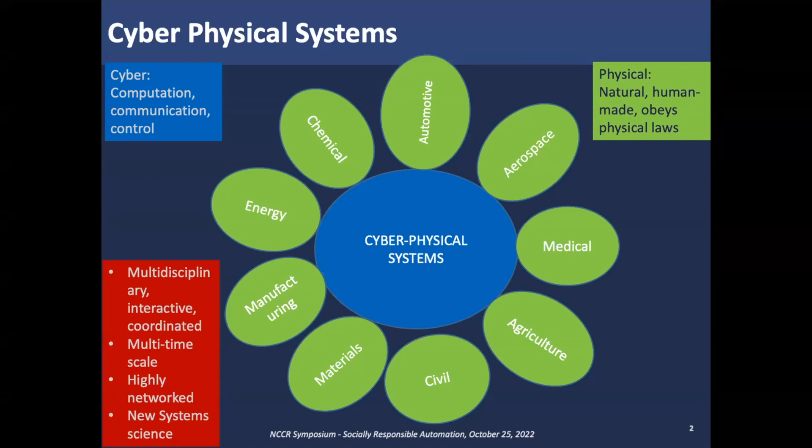Obviously the cyber aspects have to do with computation, communication, and control. On the physical side, you've got natural and human-made aspects which obey physical laws. As these things interact, they're multidisciplinary, interactive, have to be coordinated, have multiple timescales, are highly networked, and perhaps require new system science. Across the board, the role of humans, as Giancarlo mentioned, is increasing. Not only is it increasing, there are different ways in which the interaction between humans and automation are beginning to manifest themselves.

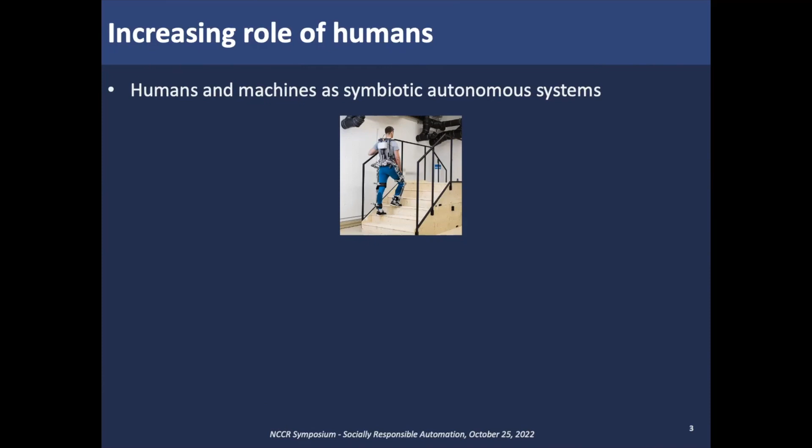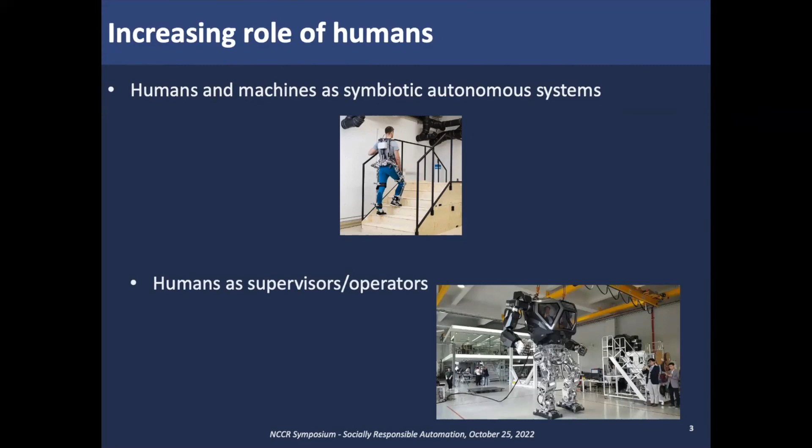In some cases, like the example you see in rehabilitation robotics, humans and machines actually have to work together as symbiotic autonomous systems. In many other cases, there are more supervisory operators, and this kind of role is not just providing some oversight, but really understanding exactly what the guidelines are that they have to provide to automation. What we are seeing again and again is that these humans are not just mere observers or outsiders, but they actually begin to participate in the overall system operation in a more concerted way.

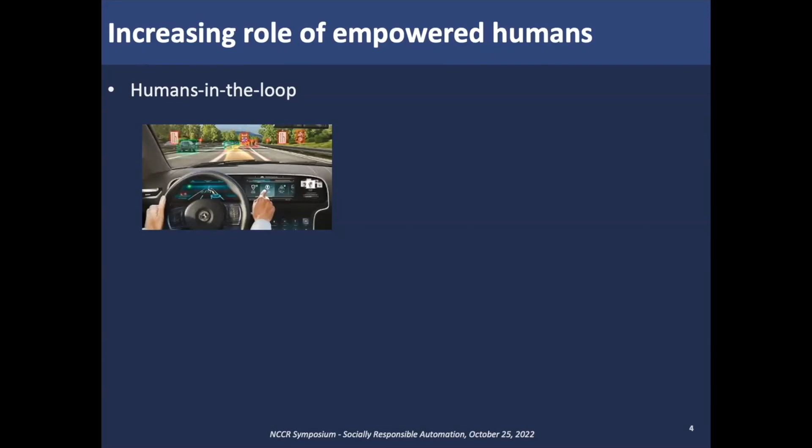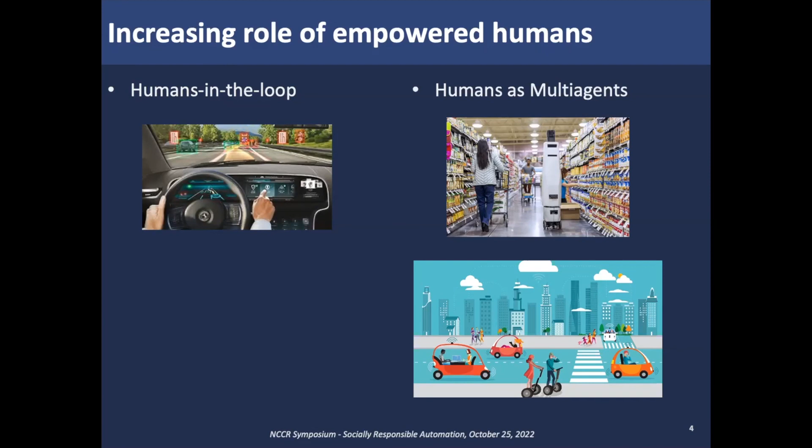Humans in the loop is a terminology that is very well understood and has been around for a long time. This is becoming even more of a center stage in the context of self-driving cars. Humans as multi-agents, I think, become more and more prevalent as we understand how to intertwine automation in the service industry and provide interfaces that become more immediate and more action oriented.

In all of these cases, what you see is the variety of interactions. If I can use this opportunity to do a little bit of advertisement, Control for Societal Scale Challenges Roadmap 2030 is a document that we are putting together that will appear, we hope, by the end of this year. In that, one of the sections talks about cyber-physical human systems, and that brings in the story of what are all the different ways in which humans and automation interact very nicely.

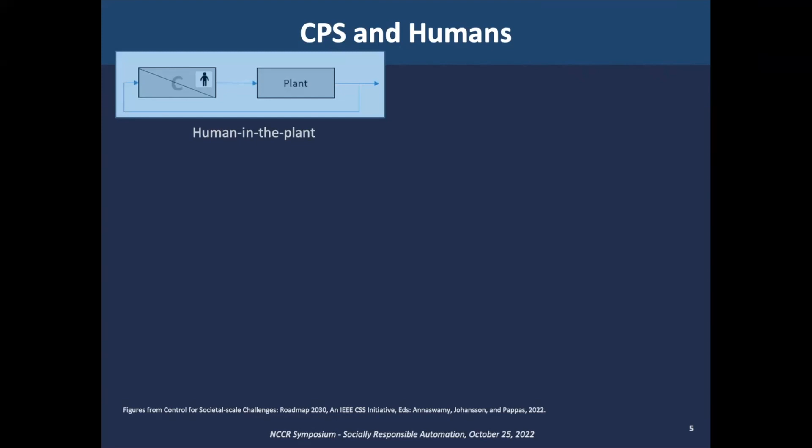For example, human in the plant. Sorry, the title got switched. Human in the controller. And again, as we go through the talk, I'll give you more examples of how they all come about. Or again, human-machine symbiosis. So these are all different ways in which the interactions occur.

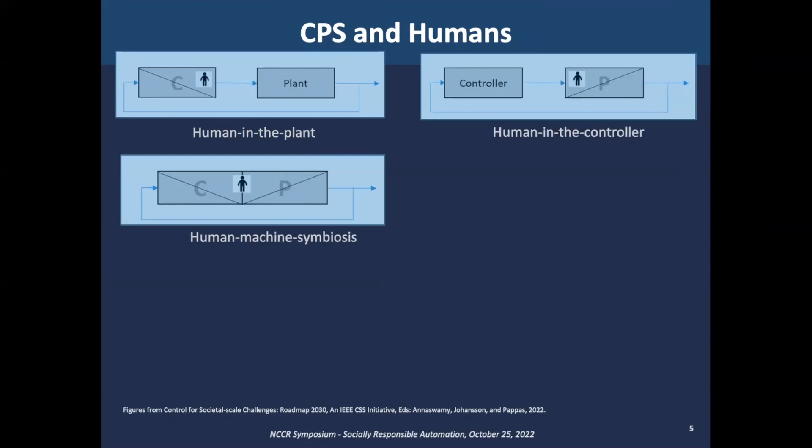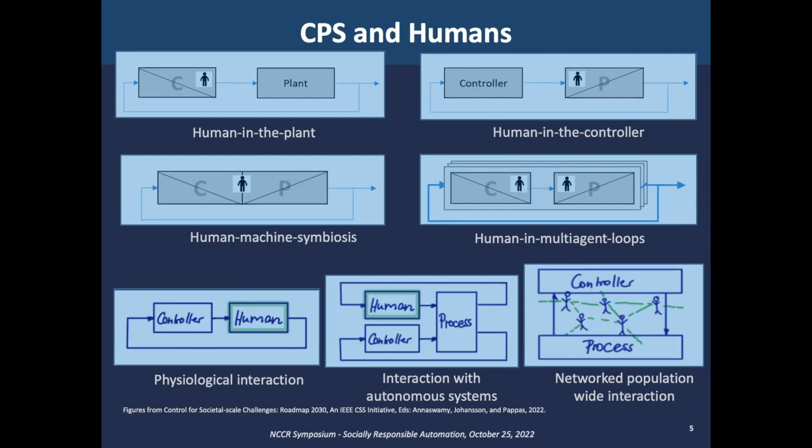Or one where there is basically a networked population-wide interaction, which makes the domain of where the human role stops and where automation begins, and that boundary becomes a lot more blurred. So in all of these cases, before we go towards social responsibility, let's try and understand what some of these examples are and to see to what extent we have started to understand the role of humans and how we are able to provide some system-wide performance goals and achieve them.

So this phrase, cyber-physical human systems, is a very appropriate rubric to consider the overall interaction. For instance, we started this IFAC series of workshops, a biennial one, and the next one is going to happen in 2022. If you've not made your reservation, please do so and come to Houston, which is just before the CDC. This provides one of the forums for really presenting the works that happen under this umbrella.

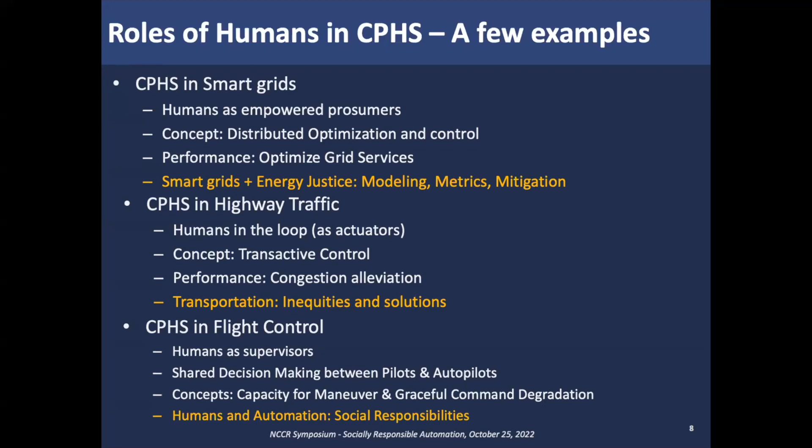And then I'd like to conclude with what happens in the context of flight control, where humans are in the form of pilots who are basically co-designing the overall decision-making together with autopilots. Okay, let's start with smart grids.

There's been a number of recent events, and I'm sure there's a similar story in Europe as well. The story I'm going to show in the next few slides is more US-centric, but it's unbelievable the number of events that have happened just in the last year.

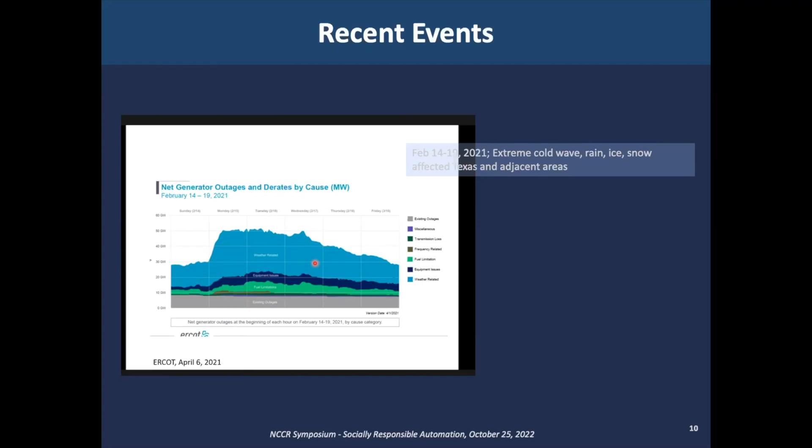For example, at the beginning of 2021 there was a severe weather issue in Texas where they experienced incredibly cold climates. There was an extreme cold wave followed with rain, ice and snow, and since the overall grid was completely ill-defined for that kind of extreme, there was a whole sequence of events that took place as a large-scale system and seriously affected the entire state. That's a whole talk in itself, but let me just say this was a significant event.

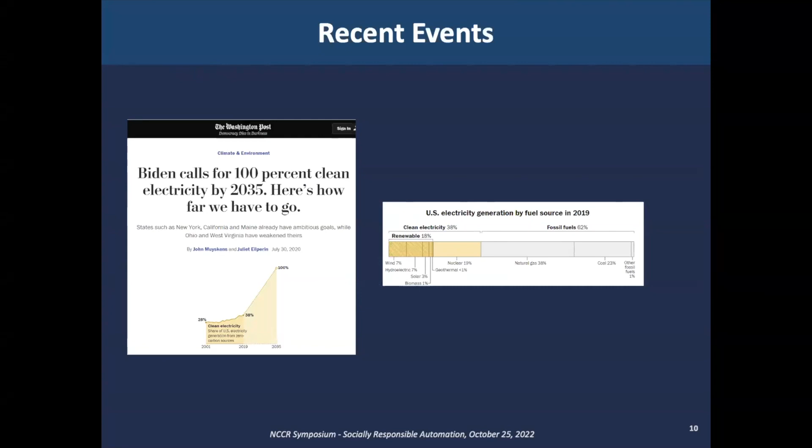Another example, and I'm sure the United States isn't alone in this: there's a big effort in expanding and modernizing the electric grid. It started as a fairly large initiative, but fortunately the US Congress was able to pass a bill looking at a significant effort in decarbonization of the grid. For instance, what we'd like to achieve is 100% clean electricity by 2035, and there's a lot of effort underway to move toward that goal.

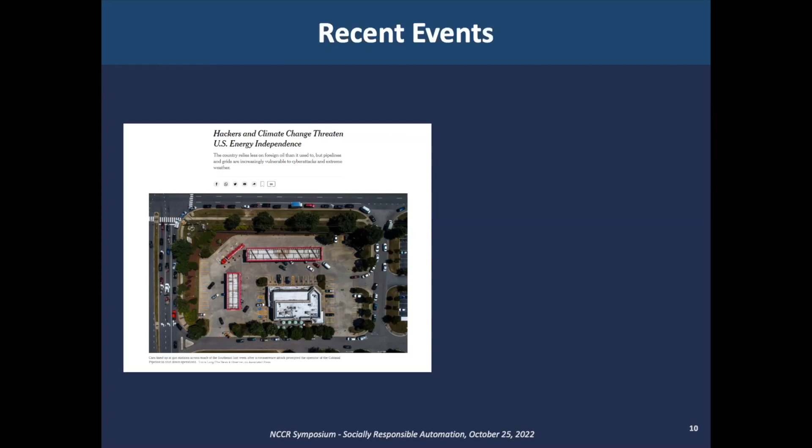As you increase the cyber footprint in order to exchange information, another thing that's happening is that adversarial behaviors are coming into the picture, and that's another interesting event that I think really focuses our conversation on how exactly we need this interplay between humans and automation to go forward and be socially responsible.

So interestingly, all of these things are introducing new stakeholders into the picture, and the consumer is very much literally and figuratively in the center of the conversation. What really needs to come together is coordination between bulk generation, transmission system, distribution systems, the entities that serve load, and markets that affect these decisions.

Renewables, and how you're able to coordinate renewable generation with bulk demand response—the notion that as supply becomes more intermittent, you have a way of adjusting demand so that power balance is achieved—storage, so that when the sun doesn't shine or the wind doesn't blow, you have a way of making sure the transition between one asset mix and another is smooth.

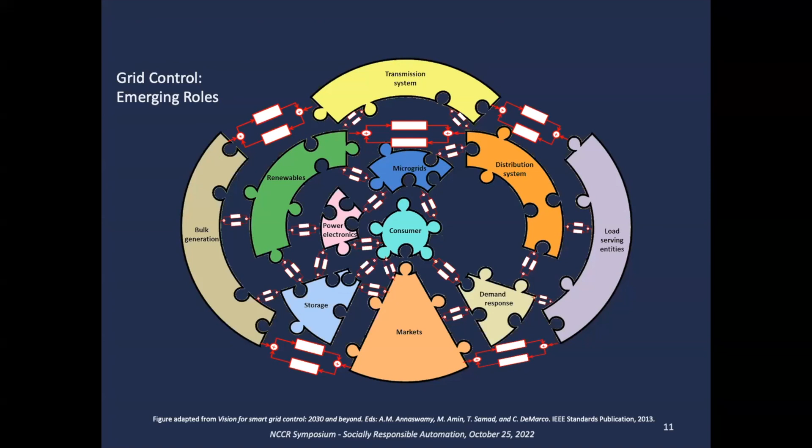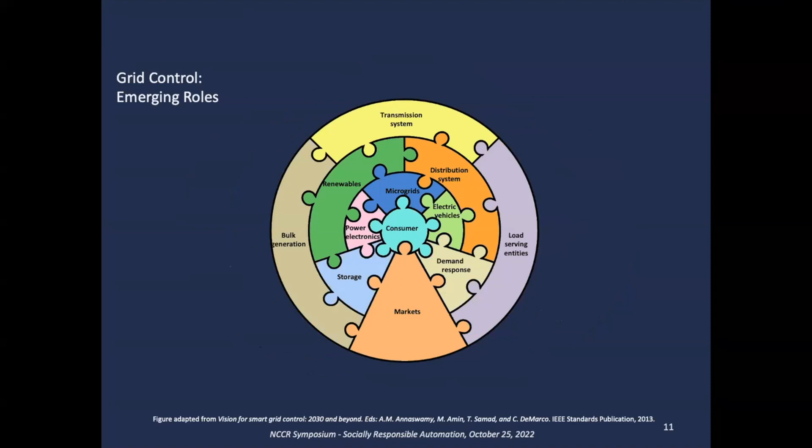Power electronics provide the right interface for the dialogue to occur. Microgrids are a microcosm of local generation, adjustable load and storage. And electric vehicles—all of these things will have to come together in order to realize a whole. Again, note: the consumer is very much in the center of that conversation.

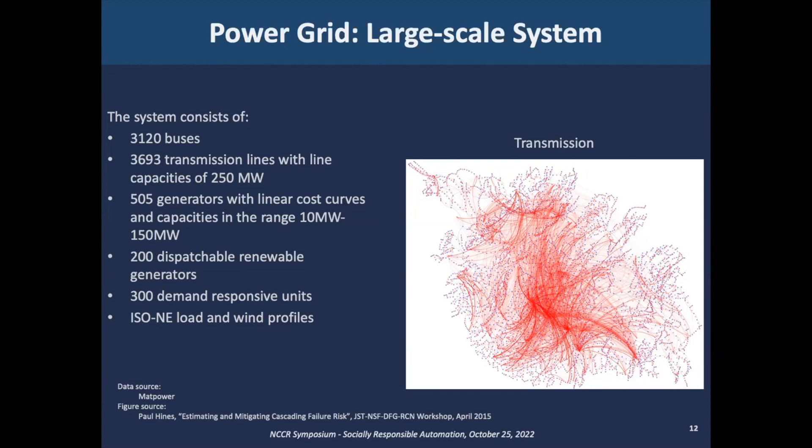And indeed, that's the direction in which we are moving. This is not science fiction, it's very much a fact. This is another example of a large-scale system.

If you do the numbers, it becomes a billion endpoint control problem. Within this scale, you have to imagine that you put consumers into the mix, and it is those consumers that we have to serve. That's indeed the objective of the grid: to provide an essential service, electricity, to every node in this grid. How do we then engage in an interaction with those humans in a responsible way? That is the challenge.

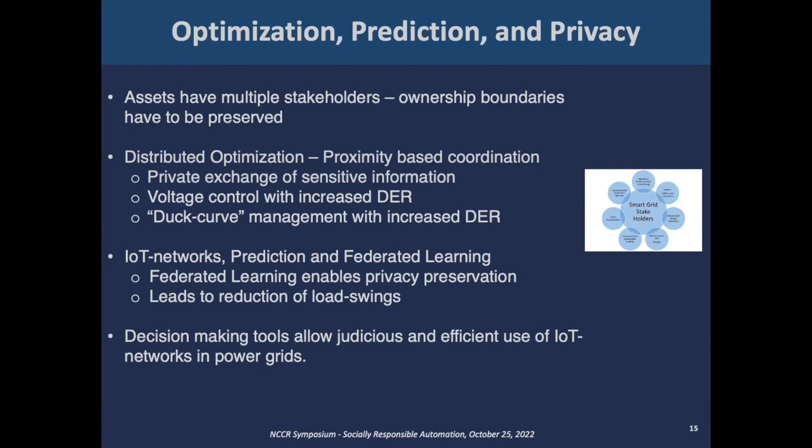So I want to quickly walk you through a specific example. There's lots of information here, so just focus on the third bullet. One of the things you want to do is make sure privacy is preserved. Data that the grid operator gets does not compromise your anonymity in any way. So how do you make sure the decision-making tools allow the appropriate use of emerging tools, like coordinating IoT networks in the power grid?

So one thing we did was say, okay, now that you've got multiple endpoints, here is a way you can look at distributed optimization. Let me take two minutes through this exercise. We said, here is an optimization problem, and here is how we can assign complexity by doing a certain partitioning. That means you have to introduce new dimensions, because you have to have copies which manage the coordinated constraints. Then we're able to take the whole problem and convert it into an atomized optimization problem.

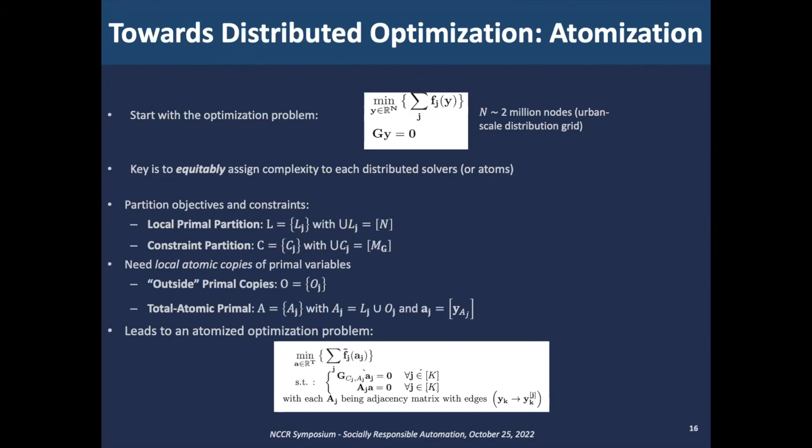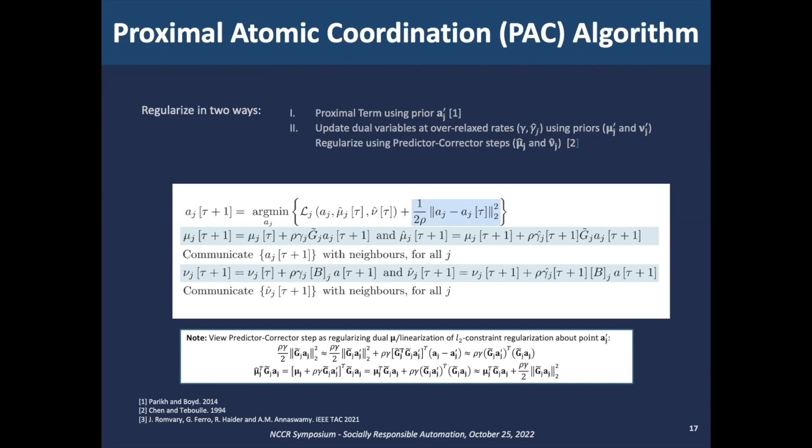But we want to make sure this optimization problem is solved keeping privacy in mind - that was our whole goal. So we introduced some amount of regularization, and did a dual ascent approach in order to do the optimization. We also had to account for the fact that there were extra copies, which allowed us to atomize each of these things separately. This said that yes, you can indeed go about solving and guaranteeing that this distributed optimization will have a solution under some conditions.

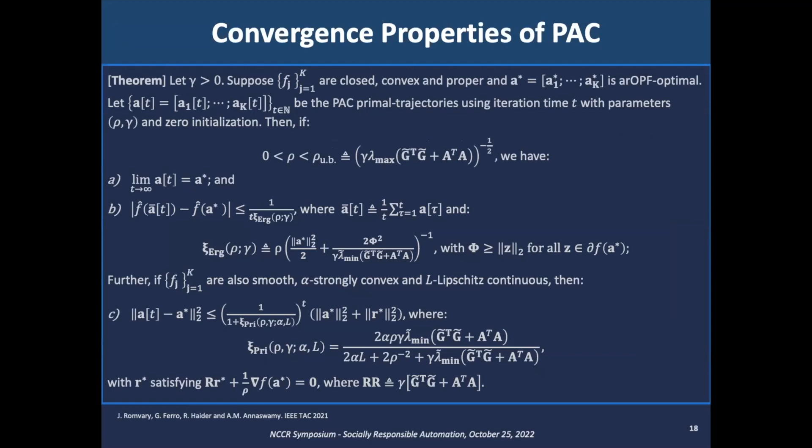We then said, let's go ahead and test it in the context of a real grid - this is a simulation exercise. What we wanted to show is an algorithm where, imagine you have a whole bunch of distributed solar, all able to provide some injection. The idea is that each one of them is compensated for the kind of injection they're providing. The local compensation in that grid provides a local distributed LMP, locational marginal price.

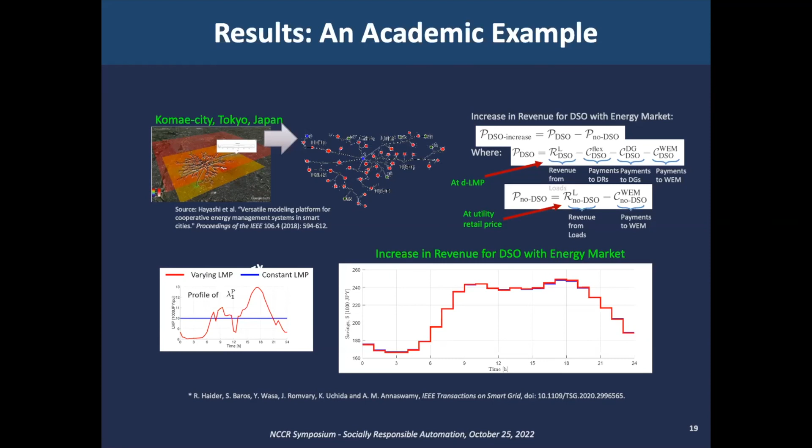That's how they're getting the incentive for participating in the market. So what we showed is that by providing this distributed optimization framework, we're able to increase the revenue for a distribution system operator. This shows you can have this sort of prosumer idea and encourage them to participate in the market. In the context of the simulation of the Japanese distribution grid, when you provide a certain boundary condition - the distributed LMP - you can show that's what happens in that section of the segment, and the same calculation occurs across the entire grid, each locally reflective of the local power injection and consumption.

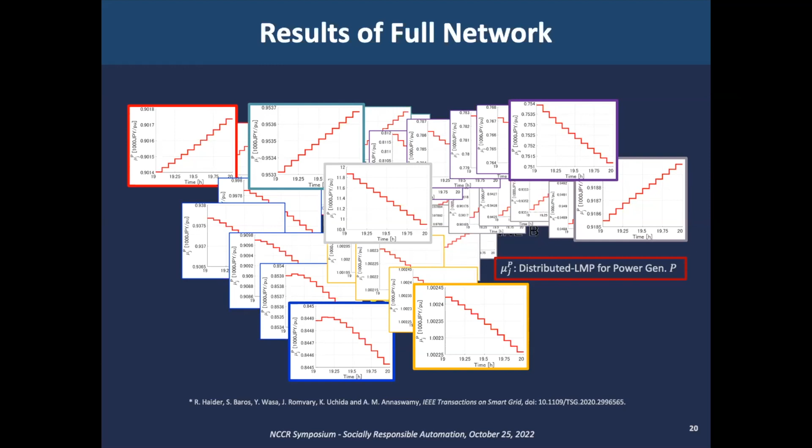So you've got flexible loads, and they get compensated, generators at a fair retail rate, and most importantly, the customers - which is really what we're talking about in terms of incentivizing and doing something at a grid level that benefits consumers at a local level - you're able to reduce the electricity price by a significant amount.

So at the end of the day, this is an exercise that's to say, A, you're preserving your privacy and allowing you to participate in the market, and B, the final service that you're looking for is to avail of the local generation that you have from, let's say, rooftop solars, and have it translate into something that reduces your electricity cost.

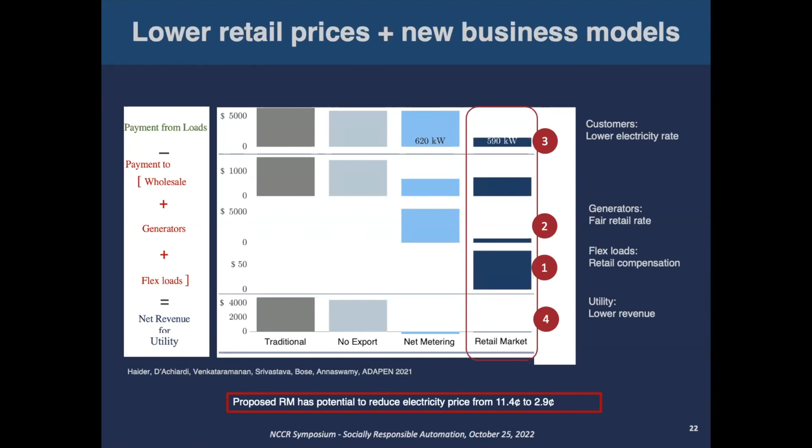So now let's talk about, with this as a framework, what is it that we can do that takes us even further? There is a significant issue.

issue when it comes to introducing smart grids, the notion of smart grids, and introducing this whole notion of distributed power generation, which has a variation both in space and in time. And that is that whenever you say consumer, and we draw one box and say okay consumer, we forget the fact that a consumer is not this monolithic entity.

And so we really have not paid as much attention as we should when it comes to analyzing the impact of smart grids on low and moderate income households. So LMI means something very different in this context here. LMI households, and analyzing the impact of smart grids on LMI households, is a very important exercise that we should engage in. And that basically is one of the messages that I would like to get across in my talk here.

There are incredibly striking statistics when it comes to the kind of inequities that are present. I meant to get that reference for you, and unfortunately I ran out of time. The US Department of Energy basically has numbers showing there is a significant difference between the amount of money spent on energy in various households compared to LMI. And so they spend 18% of their income, which is a significant amount.

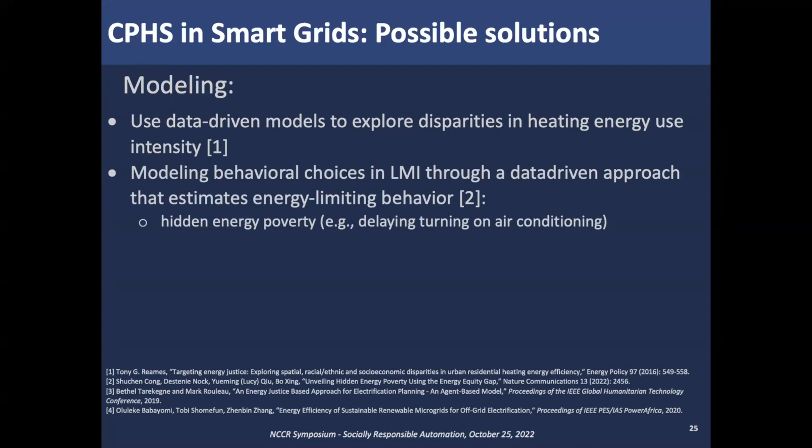There are methods that have been looking at data-driven models to really understand what kind of disparities exist when it comes to heating costs, and what kinds of behavioral choices in LMI households help estimate energy-limiting behavior. The planning process, by including an agent-based approach, can do better.

The relationship between understanding how microgrids can be designed with underserved communities is something people have started to look at.

There are, of course, benefits to understanding that even if you don't have solar energy yourself, there's an overall reduction in pollution, but those things have really not been quantified yet.

So some of the things we can do, and places where we could begin the conversation: simple things like, is it possible to really design incentives that can help reduce solar adoption inequalities? I'm assuming the next talk about the token system—I like the concept of karma—will probably address more of that, and I'm looking forward to hearing about it, but these are all things we need to think about.

Is there a way we can include equity-based components in the overall cost function we're trying to optimize? That should be a fairly low-hanging fruit, it seems to me, and we don't do enough of that, and we should.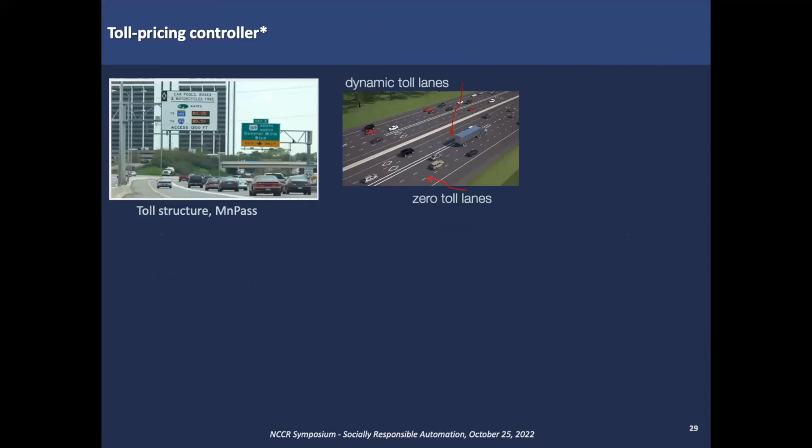There's been a lot of urban mobility components that have tried to use a transactive control strategy, using prices and fees as a way of doing resource utilization. So the main idea is that across the board, many different cities have started to explore the use of dynamic toll pricing.

In order to alleviate congestion, the idea is simply this: you've got a sensor that measures the density, and then you use the density information to determine the price, which changes the toll price. The driver—you and I—look at the toll price and decide whether to take the dynamic toll price lane or not. By doing that, we change the boundary condition of that particular segment, which then changes the density of traffic, and therefore alleviates congestion. So that's the whole idea.

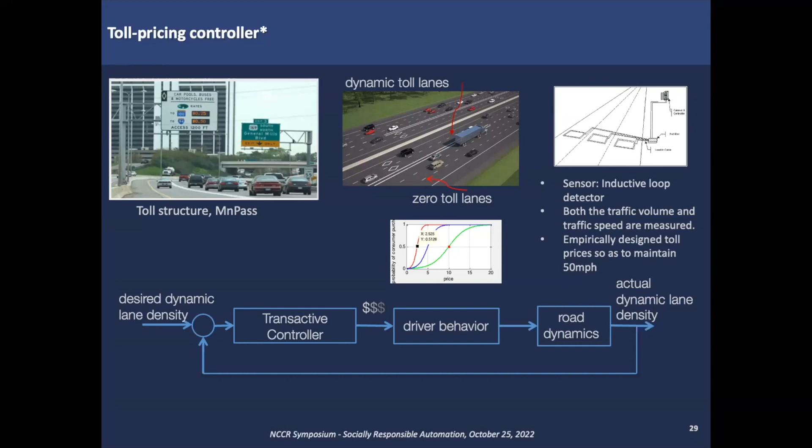So we went through this exercise, and one of the things you have to do is model the driver and the behavioral aspects—what exactly is the utility function—and then can we, based on that utility function, design this transactive controller? You and I are basically actuators, and by modeling the actuator you can do a model-based control design. This turned out to be a nonlinear PID controller, which we went on to design and show that it worked. You can go read the paper for more details.

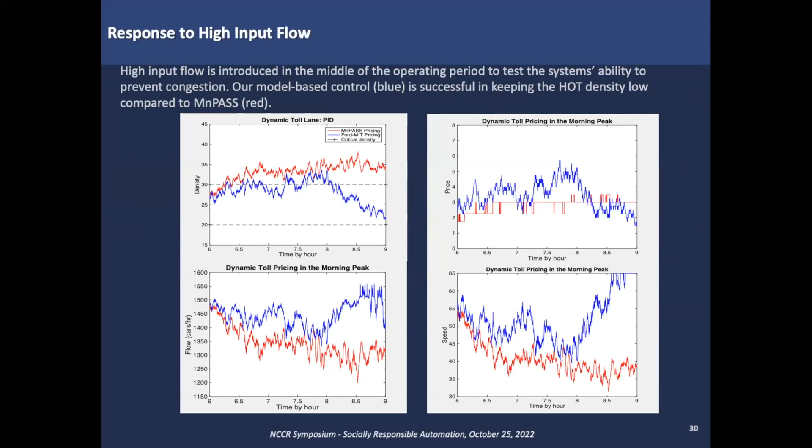It worked, and we showed it in simulation. We in fact recently did a similar exercise for a highway segment near Lisbon, and there too we had a very nice example.

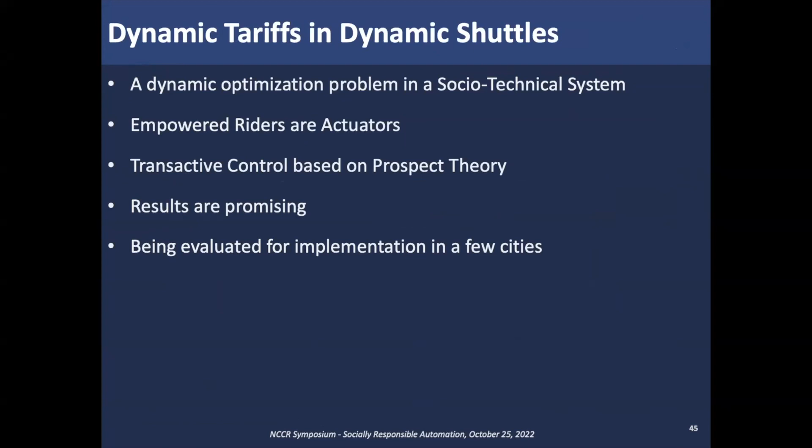I'm going to skip the next few slides because I just wanted to make the same point—I think I really overestimated how much I can cover in an hour. But the idea here is that overall you can do a dynamic optimization problem, develop a socio-technical system model. The results are promising and are actually being evaluated for implementation in a few places, but there are most certainly inequities we have to worry about, and ways in which we need to address them.

So clearly, the fact that you have a dynamic toll lane introduces a notion of inequity—it's like having a business class, right? So the question is, is that the right thing to do? Are we making sure that when we design that...

One of the things we said was, okay, the highway system has a peak of $8, and normally it can go down as far as 25 cents. So if they say $8 is the peak, and they've done due diligence, and $8 is a number that addresses this inequity issue, then we're going to work with $8, and then we designed our control strategy. But do we really pay attention to where that 8 comes from, or do we have a way in which we can actually have a differential price adjustment based on some sort of social rating system?

Those are all things we could incorporate in the design, but we don't necessarily engage in that kind of exercise. The only point I'm trying to make is that some of these cross-subsidization aspects need to be addressed. Look up cross-subsidization—it's a very nice metric that tries to evaluate, when you introduce a piece of technology, how much inequity it introduces. That's something we should pay attention to.

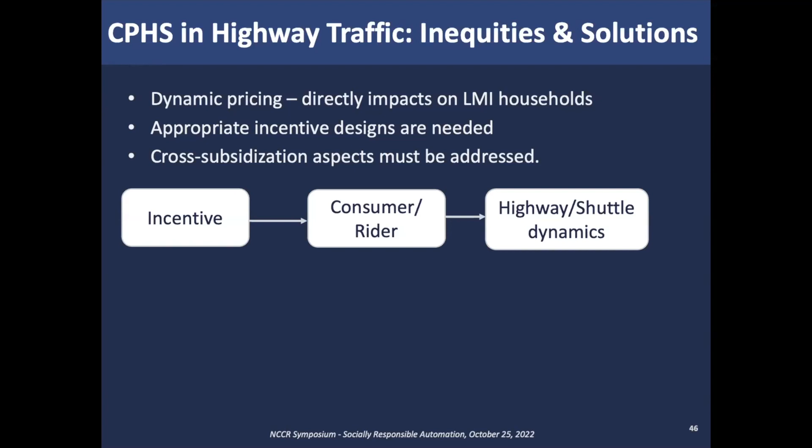So the point I'm trying to make here is that as you try to design some of these algorithms in the context of urban mobility, LMI concerns—not linear matrix inequality, but low and moderate income household—should be addressed. One thing that could be looked into: there are bodies, entities, and organizations that have an understanding of what some of the incentive mechanisms should be.

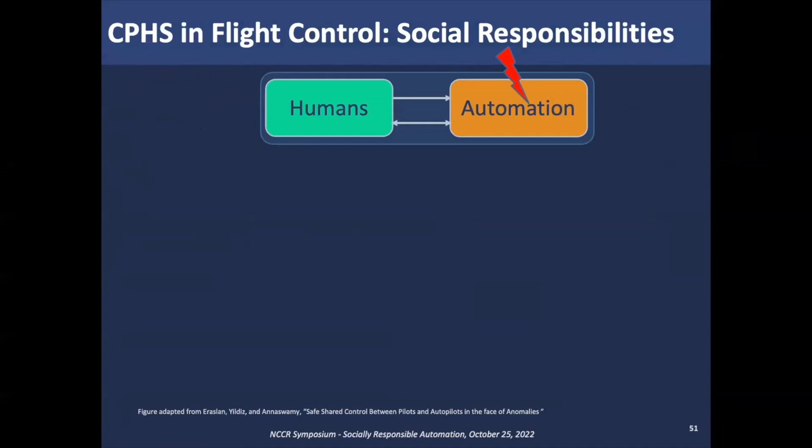And some of those things can be taken into account when we design the LMI concerns, and appropriately the incentive gets stitched together with a piece of technology. I did want to bring up a third example, let me go into the issues in flight.

This is a different example where humans and automation are working together to address a problem where there is a severe anomaly. It's actually a very interesting story, but maybe I can go over that at another time. Imagine there is some big anomaly—lightning strikes, bird flies into the engine, whatever. There are a whole bunch of tasks you have to do, and you have to do them in a certain timeline.

Let's imagine you break down these tasks, and everything in orange is basically something automation does, and everything in green is what humans do—that's the color legend. So immediately following the anomaly, what we showed was that you need to basically introduce some new tasks, and those new tasks are something that humans should do.

Not only that, some of the tasks that automation used to do is something that the human should take over. But then after they finish the transition, you don't touch A and B—you leave A and B within the purview of automation. Post anomaly, you then make the transition and give it back to the automation, because now you've recovered and the humans have done their thing.

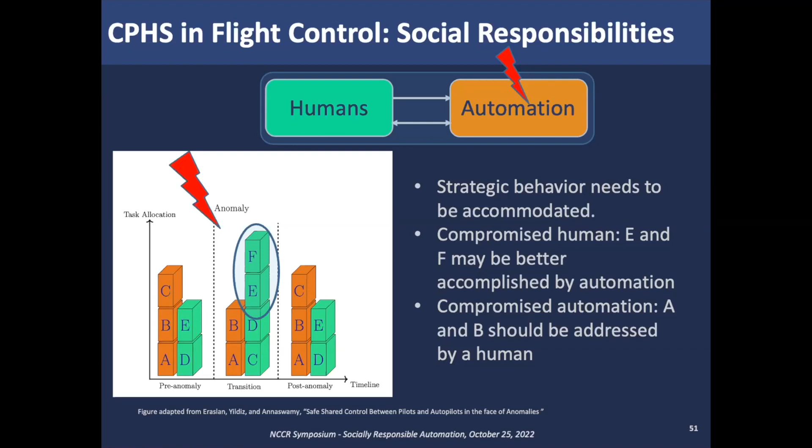In that case, it could be very well that E and F is something that automation should take over rather than humans. Or it could be that if the automation is compromised, as in a cyber attack, then even A and B are things the humans should probably take over. Those are all things we need to worry about as we move towards social responsibility.

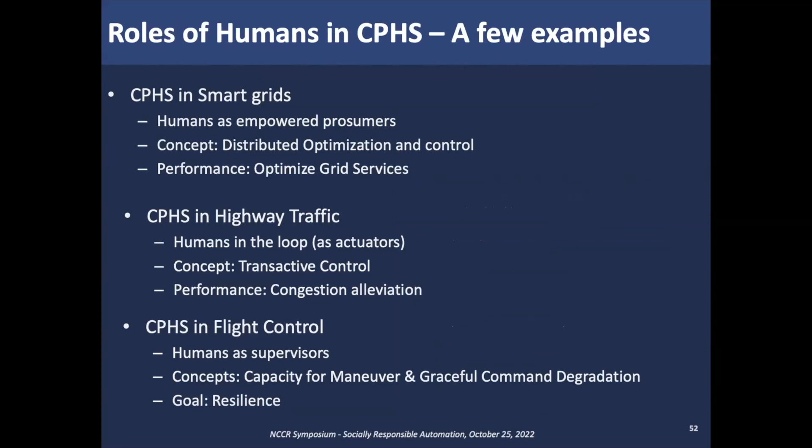So maybe with that, I'll stop. These are the three examples—the first one I walked through more slowly, the other two a bit rushed. But the idea in all of these is that in the context of smart grids, energy justice is a topic that needs to be investigated, and modeling, developing metrics and mitigation for LMI households is something we can do.

One way we can look at grid performance is by looking into an optimization framework that includes energy justice-based metrics. In the context of highway traffic, we need to really address the needs of all consumers—cross-subsidization aspects can be and should be addressed. And in the flight control problem, we really need to address the fact that there could be adverse actors, either on the side of humans or automation, and they have to be appropriately contended with.

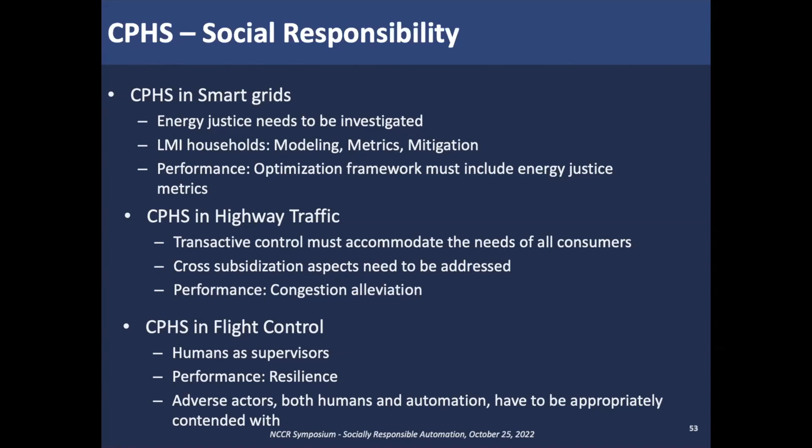But again, I have no results to show you explicitly—there are things we've started to look at in the context of CPHS, but we need to advance the conversation much further to move towards socially responsible CPHS. Thank you.